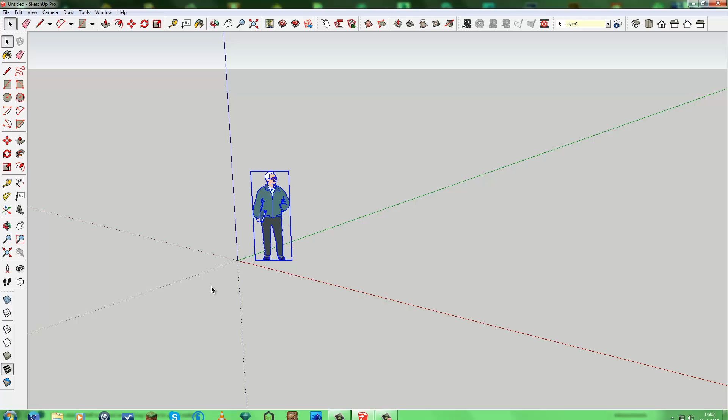What I'm going to teach you today is the push-pull, the scale, follow me, and the copy-pasting versions of all kinds of stuff. First, we're going to delete him again, and we're going to make a square. Just 200. I know finally what it is. It is semicolon 200. Going to zoom in a bit.

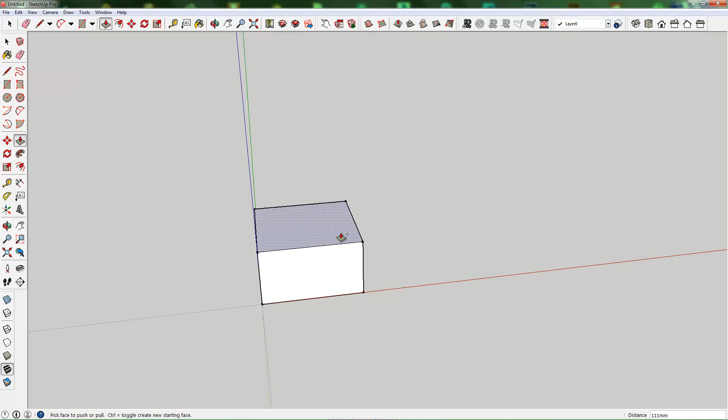Well, the push pull we already had. That's easy. That's push pull like this, right? But what if you want this, but the same size block on top of it? Well, you can push the left control key on your keyboard, and you get a little plus at the right corner of your icon. That means it's actually copying, extending the one you have already with a new kind of plate. So now you have two faces, you can each separately push pull.

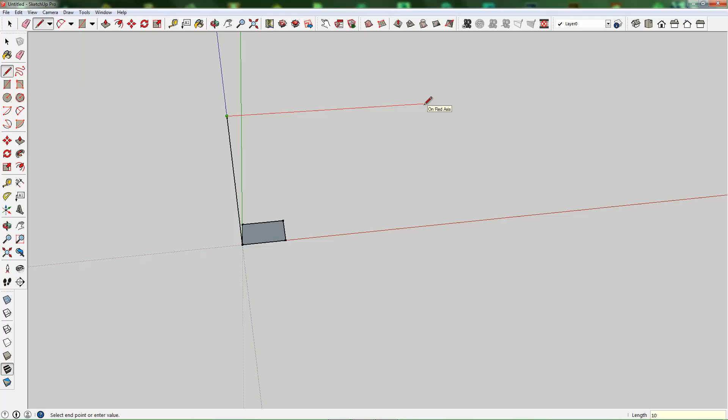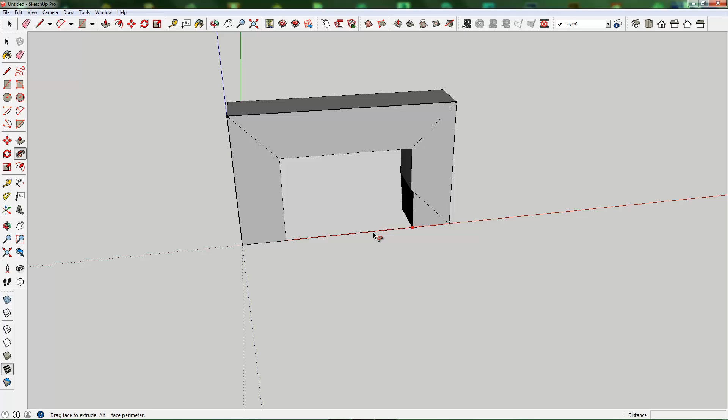Imagine if you want to have a frame from, what shall we do? 600 height by 1000 by 600 again, or you do this, so it snaps, and you go back here. You're going to delete this by selecting and pushing the delete key. Then you're going to this icon here, say follow me. You're going to click it here and actually drag it along the line we have set just a second ago. And there you have it, your own frame.

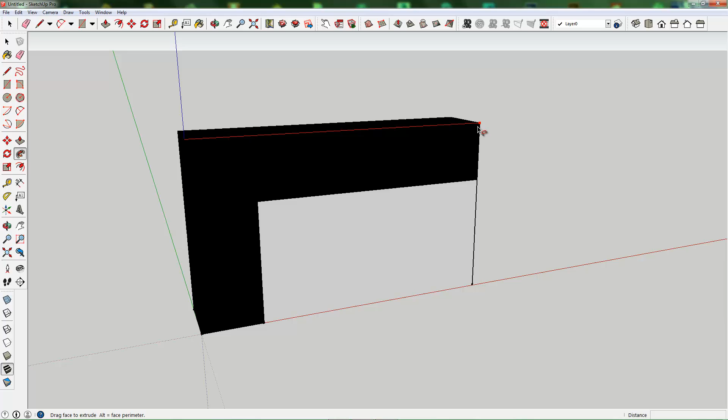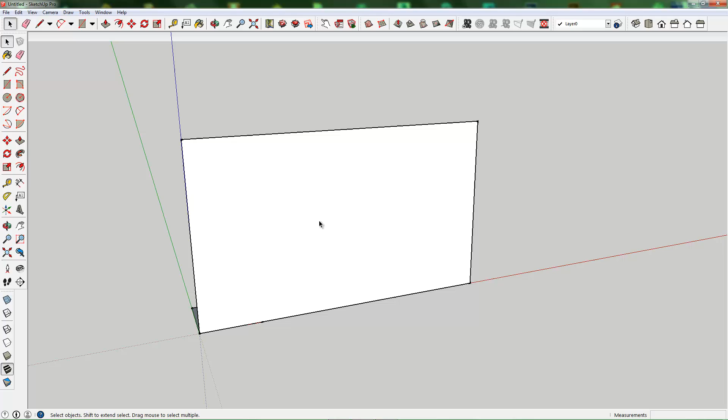Well, this is the easiest way to make a frame. You can do it with push pull and everything, but follow me, it's like you put a square on the bottom, you make a wire frame around it, and you do follow me. Now you can do it with only this, but you cannot go again to here because you need to have a line attached to both ends. So if I do this again and I create a line between these 2 points, it's going to make a plate again. You delete that, click on follow me, and you go around the frame, and you got yourself a frame again. There are multiple ways to make a frame, but this is the easiest one.

I also got the offset. Offset is a tool that can allow you to make a square or a shape inside or outside the same shape. If I click on this and I drag it out, it makes an exact shape. That's it. Only bigger, and it's registered from the point you have taken right here. See on measurements it says 0 millimeters.

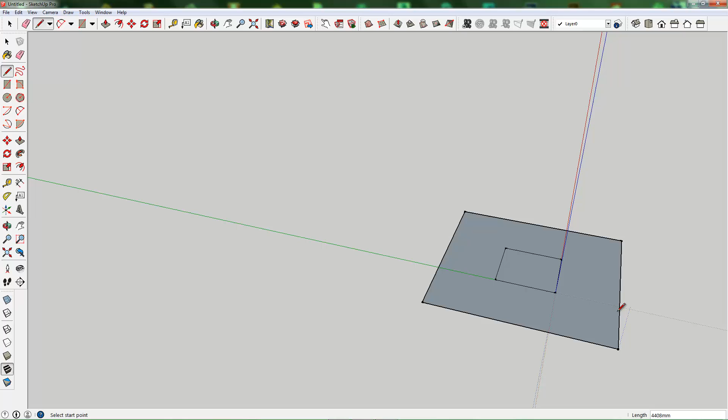Now drag it out to say 200, and you actually got a square now that's from the mid here to mid there 200. So keep in mind it's only from the mid of the beginning square to the mid of that square. So this is 600. Seems okay, because this was what, 200. You get there 200, there 200 equals 600. I'm going to delete that.

Oh, be careful if you orbit with your middle mouse button when you don't have anything there, because it can do like this. So if you have a mouse like me that can change the DPI, change it as low as possible. I have it now as low as possible. My mouse is going really slow and I'm dragging it over my mousepad, and you can see it goes really slow. And that also helps with SketchUp with building and everything.

I have now the second advanced toolbar on. If you want that, click on View, go to Toolbar, and some of these options may not apply to you because I have the Pro version, and some toolbars are only for the Pro version, like Advanced Camera Tools. That's right here. But I will get to there in a few parts, I think. But what you wanna do now is go to Large Tool Set. If you don't have that, you don't get this here. So go to Large Tool Set, click on Close, and you get this, where you can have the Follow Me. Scale is also there, but it's way easier here.

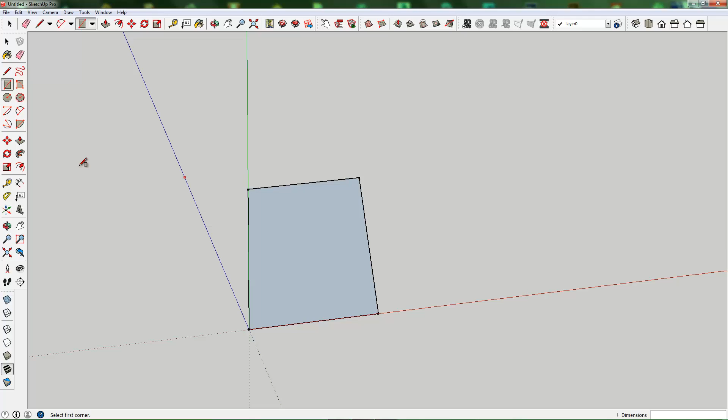I'm now going to demonstrate the scale option. I'm just going to make a random shape of 450 by 600. And if you want to scale something, like make it 2 times as big, you need to select it, drag from right hand corner to the left hand corner, so you get the dashed line. That means whatever it's attached to, it will select. If I do this, it's going to select this, this, and this.

If I do it otherwise, like that, it won't select anything, because this means it needs to be in the whole selection to be selected. See, if I do it like this, just not enough, it won't select. If I do it like this, it will select. The best part is if I do this, you get the dashed line. It will select multiple parts.

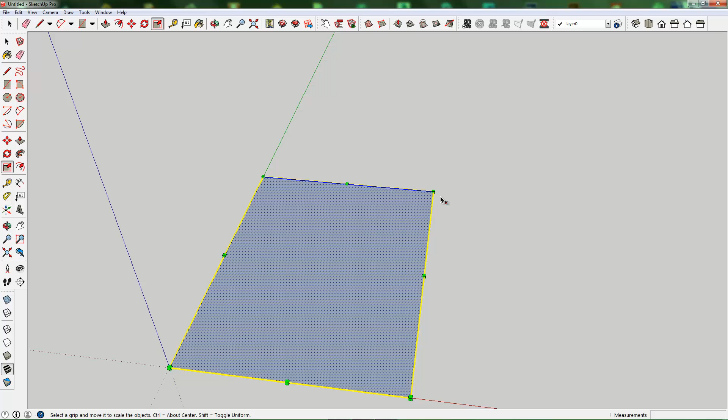So select everything, go to here, or push the S key on your keyboard, and you get this yellow frame with green squares, cubes on the corners and the mids. That means you're doing it good, because that's the scale option, and here you can scale it like this, and you see red scale.

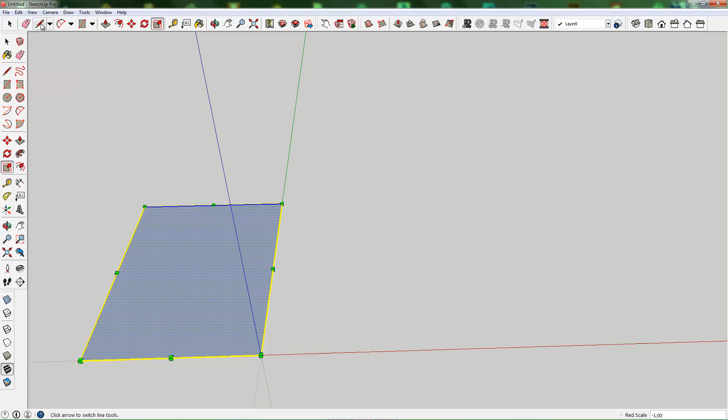This is the red axis scale, 2 times as big, half as big. You can do the original, but you can also do it like this. You can mirror it. So -1 means that it's mirrored from the original. If I make, let's say, do it like this, make a triangle in it with this, this, and that's maybe not the best example. I think it's better to do this.

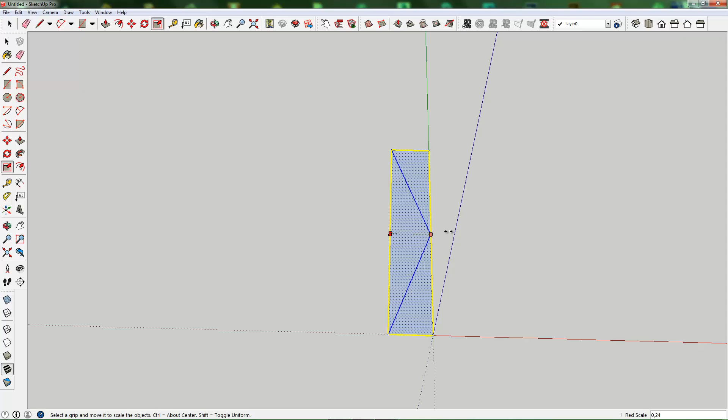I've made a triangle like this. It's now facing that way. If I select this whole thing, go to scale, and I pick this one, and I type in -1, it's going to turn with it, so it's literally mirrored from the original one.

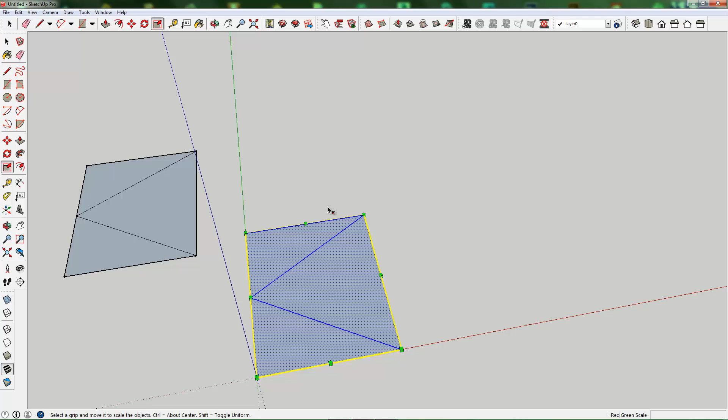What you also can do is take the corner and mirror it, or scale it like this, so it is in the green axis as well as the red axis, twice as big. So from the original one, I will copy that one with Ctrl C, Ctrl V. I will scale this one to twice its size in the corner, so 2. And now you can see this one fits 4 times in the bigger one.

An easy way to do this is, of course, with Ctrl C, Ctrl V to copy it, but there's another way to do it. You hit M for move, or click here or there, no matter where it is. You hit the Control key, and in the right bottom corner you get the little plus. If you click it here, you actually make a copy and can move the copy wherever you want, from which point you want.

So if I select this one again and do move, and then this corner, Control. You only need to hit Control once. You don't have to hold it down on anything. Just hit it once, and from this corner, and so you can see it fits 4 times in the bigger one, and that's a way to copy something.

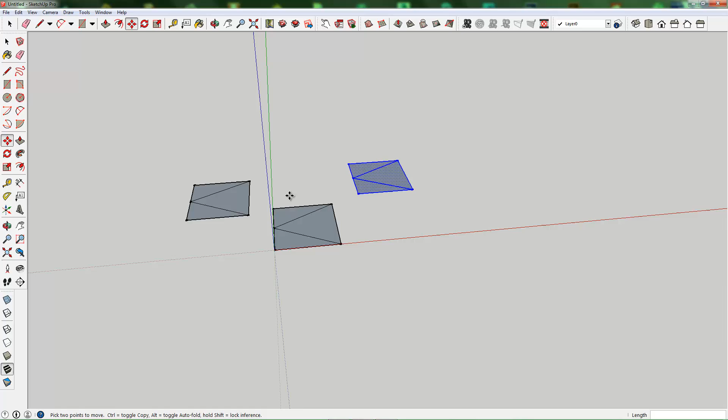If you want to copy something, just select it, go to move, pick whatever point you want. It doesn't matter. Hit Control and just drag it somewhere you want. Of course, we can push pull them. You can also push pull them down. Now you see you get this opening here. If you want that, it's okay. If you don't want that, hit Control and push pull it down. So this is a way to have it closed. If you don't want that, just push pull it down, and it will be open.

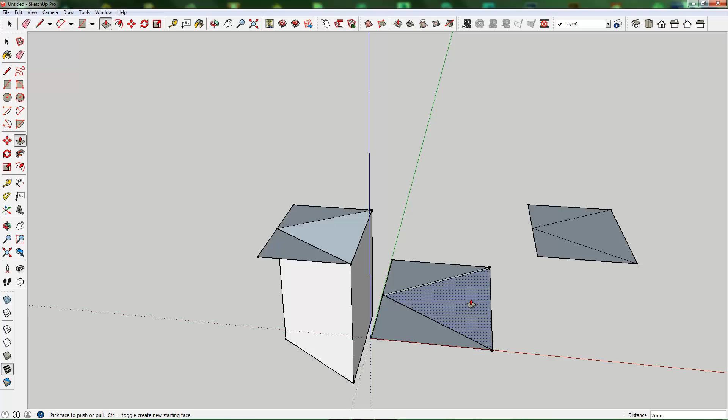That also applies to going up. If you look at the bottom, it's open, it's hollow. If you don't want that, Control, drag it up, and it's closed.

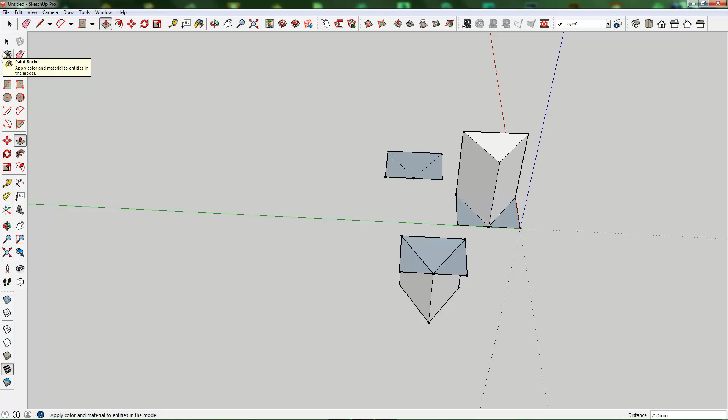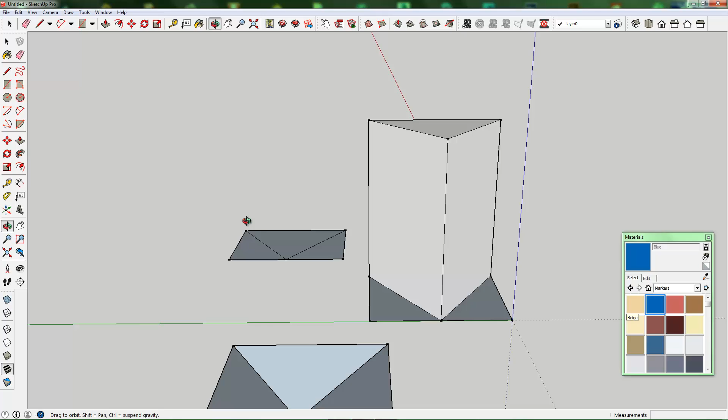Well, I have a little bit of time left. What I can show you is the materials. As you can see, we have a white face and a darker face. Those represent the 2 faces you can color, but you can color them simultaneously. Let's get blue out. So if you hold Shift, it will paint all of the white faces no matter where. It will paint all the white faces the same color.

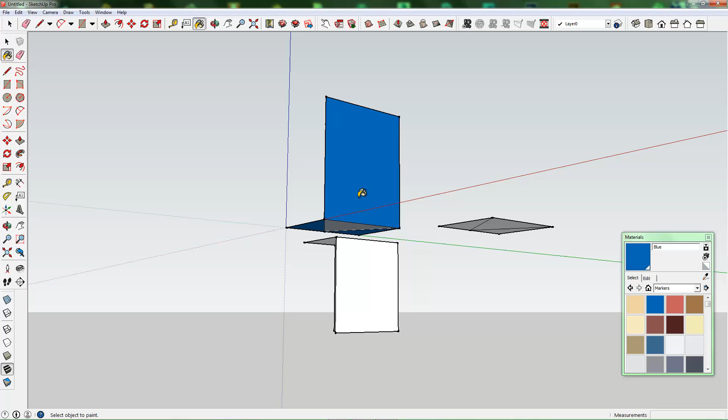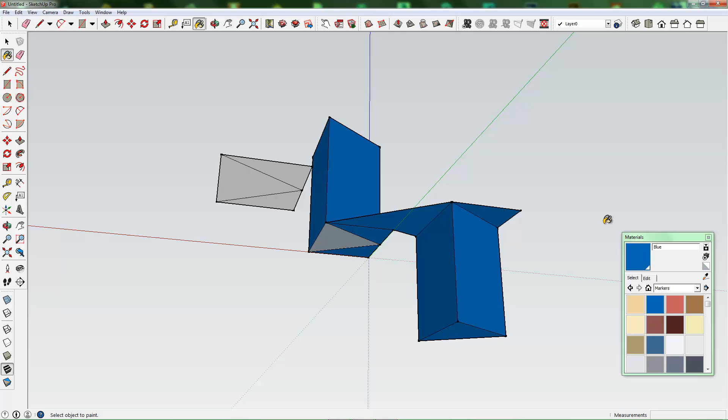If you hit Control, I need to have a color, of course. If you hit Control, it will only paint the same color face on only that object. If they're not connected, it will only paint it on this one. If I connect this with a line here and a line here, now these 2 are connected. If I do the same thing over again with blue and I hit Control, because they're connected, all the white faces turn to blue. I can do that with this one too. Now they're all blue. I pick cobalt, of course, for some reason.

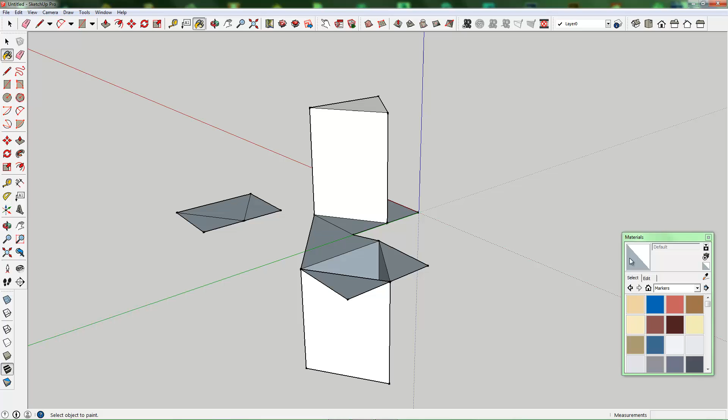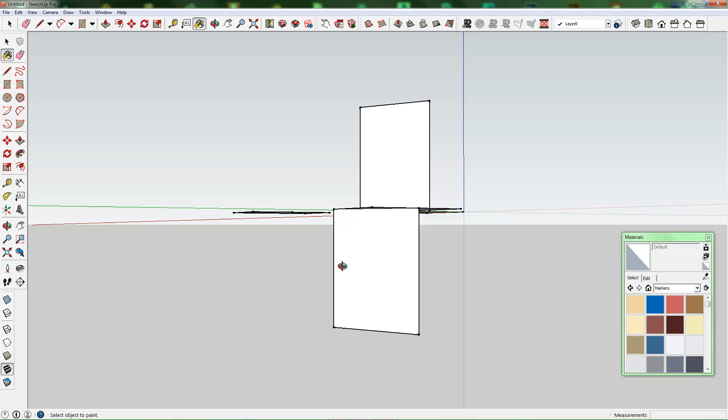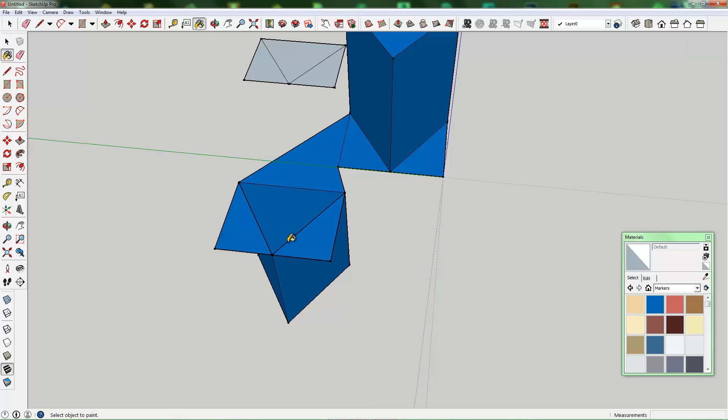Yeah, that's it for now. I hope you enjoyed this tutorial series, and I hope I taught you something about SketchUp. It's a pretty good program. You can do a lot of things with it.